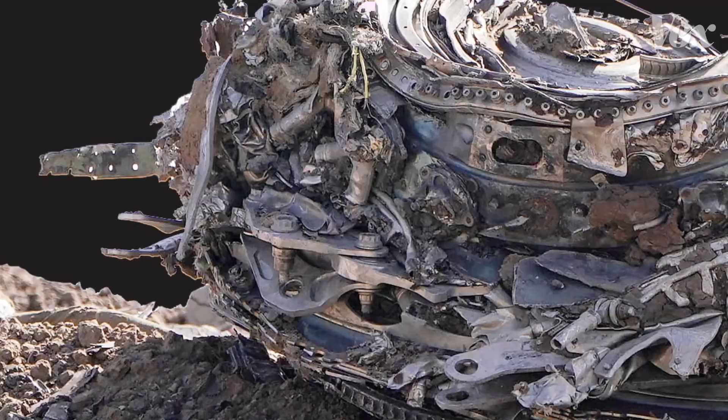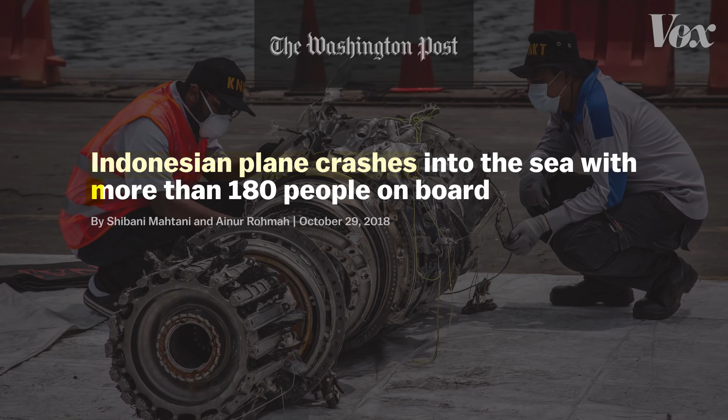This is an airplane engine. It's sitting in a field in Bishoftu, Ethiopia, part of the wreckage of Ethiopian Airlines Flight 302, which crashed on March 10, 2019. 157 people died. This was just a few months after another flight, Lion Air 610, crashed in Indonesia and killed 189 people. These two flights were operating the same plane, the Boeing 737 MAX 8. And its engine is the key to understanding why this particular plane has caused so many problems.

But there's nothing actually wrong with this engine. In fact, airplane manufacturers raced to put them on their new planes. That's where the problem started.

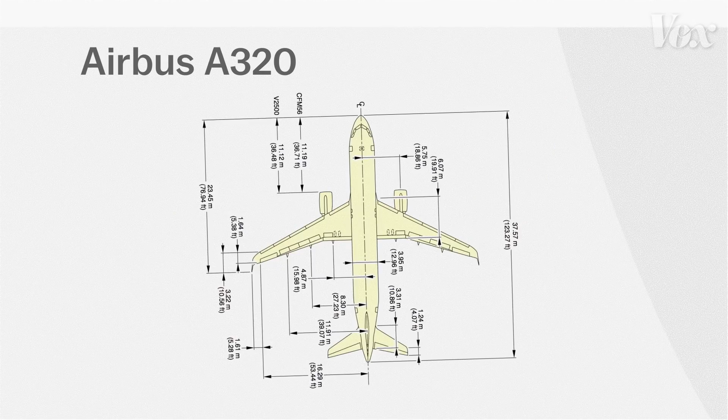The two biggest airplane manufacturers in the world are Airbus and Boeing, and they have a fierce rivalry. If one of them can offer a better plane, the other could lose a lot of money. That's exactly what was about to happen in 2010. Airbus announced that they would update their most popular model, the A320, a single-aisle airplane that services many domestic flights. You've probably been on one.

For this new plane, Airbus had a big update. It would have a new kind of engine. It was much larger than the previous engine, but it would make the plane 15% more fuel efficient. And just as importantly, this upgrade wouldn't change the plane that much. A pilot could walk into the new model with little additional training and be on their way. It was called the A320neo, and it would save airlines a lot of money.

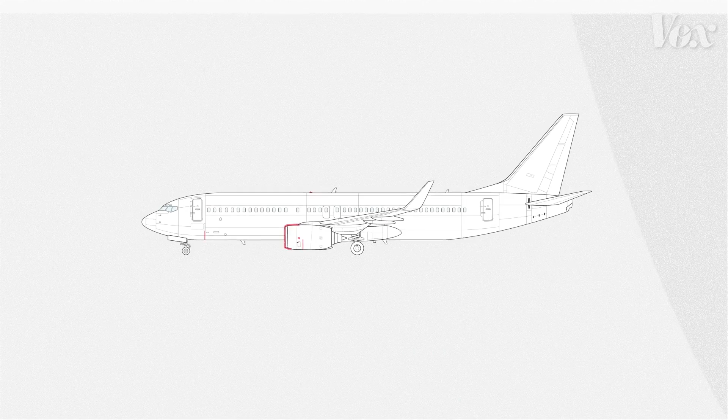This was a problem for Boeing. To compete with Airbus, Boeing's obvious move was to upgrade the engine on their single-aisle plane, the 737. But there was one issue. Here's a sketch of the 737 next to the Airbus A320. Notice how the 737 is lower to the ground than the A320. This meant Airbus could slide a new engine under the wing of their A320, but there wasn't enough room under the wing of the Boeing 737.

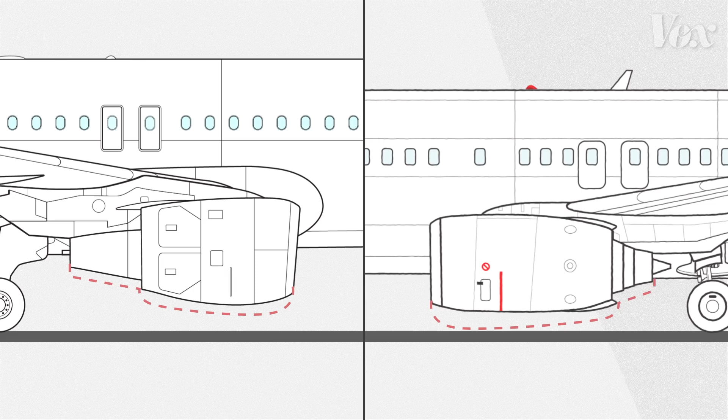But a few months later, Boeing's product development head had big news. He said, 'We figured out a way to get a big enough engine under the wing.' Their solution was to move up the engine on the wing so that it would be slightly higher, and it would fit on their 737s. Here's a promotional video of that updated 737 in the air. You can actually see that the top of the engine is above the wing. Boeing called this model the 737 MAX.

And just like Airbus with the A320, Boeing said that their new plane was so similar to its predecessor that pilots would only need minimal additional training. The 737 MAX became the hottest selling plane on the market, and it helped Boeing keep up with Airbus.

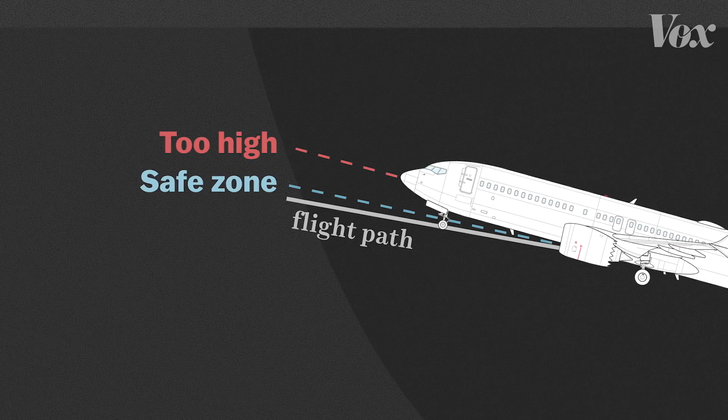Except moving the engine up on the 737 had a side effect. When the 737 MAX was in full thrust, like during takeoff, the nose tended to point too far upward, which could lead to a stall. This was a problem because these planes were supposed to behave exactly like the old ones.

So Boeing came up with a workaround. Instead of re-engineering the planes, they installed software that automatically pushed the nose downward if the pilot flew the plane at too high of an angle. They called it the Maneuvering Characteristics Augmentation System, or MCAS.

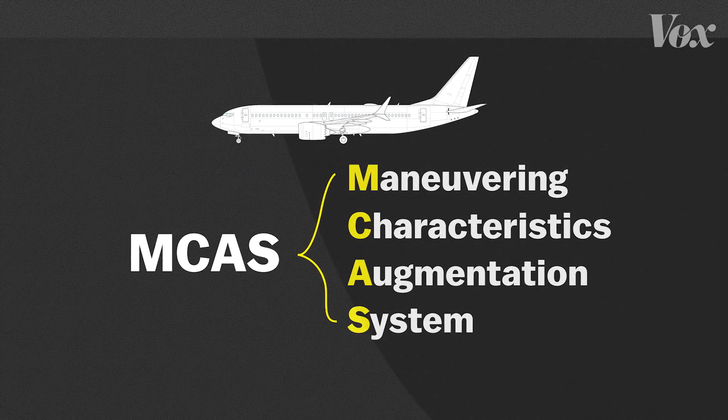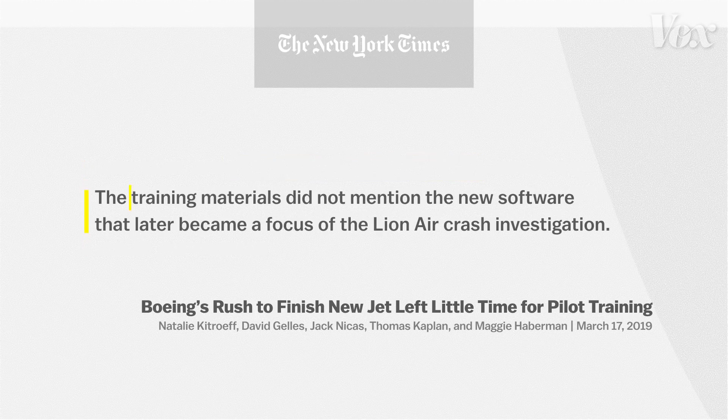But because Boeing was selling the 737 MAX as pretty much the same plane as the 737, they didn't highlight the new MCAS system. Many pilots only got a 2-hour iPad course before entering the cockpit for the first time. And the training material didn't mention the MCAS software. In 2018, several American pilots complained to the federal government that the 737 MAX was suddenly nosing down.

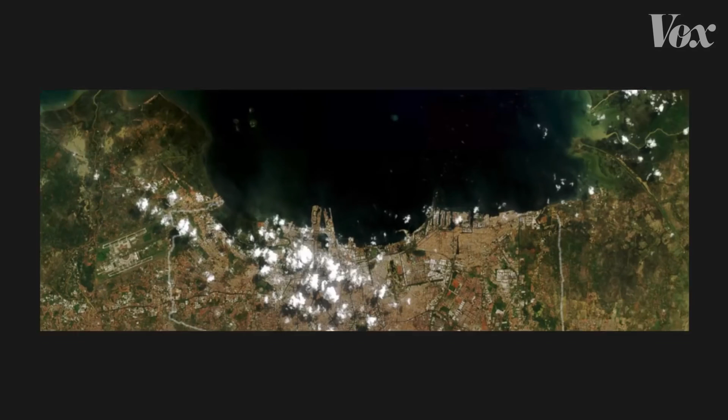They couldn't find the solution. The pilots continued to fight with the MCAS. The plane struggled to gain altitude. Reports show it was likely because the computer was getting incorrect sensor data, pushing the plane toward the earth below. 12 minutes after takeoff, the plane crashed into the Java Sea.

In the Ethiopia crash, the report shows that the pilots were actually able to disable the MCAS, but it was too late to overcome the malfunctioning MCAS sensors. For now,

Nearly every 737 MAX 8 in service has been grounded, and the Federal Aviation Administration is facing scrutiny over how they rushed this plane through certification. Boeing's response has been to apply a software update that makes the MCAS less aggressive, while also saying they'll increase pilot training on how to turn it off.

This problem started with the company's race to compete with its rival. It pushed them to pretend like their new plane behaved exactly like their old one, even when it didn't.